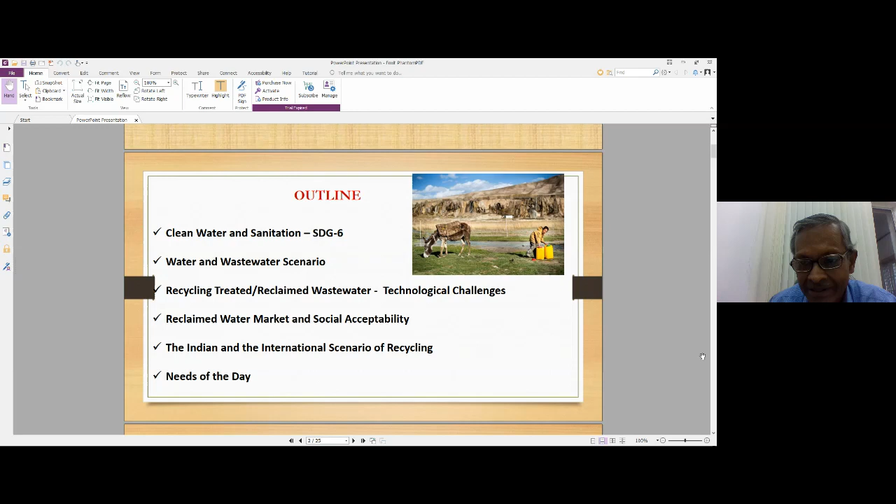And the Indian and international scenario of recycling and needs of the day - these are the things I will try to touch upon.

The Sustainable Development Goal 6, which includes clean water and sanitation, started as part of this set of 17 Sustainable Development Goals. Action on these goals began 5 years ago, following the UNDP Millennium Development Goals, where goal number 7 also included water and sanitation issues under the name 'ensure environmental sustainability.' The Millennium Development Goals were considered a big success, and that is why the Sustainable Development Goals started as a follow-up in the same year, 2015.

So Sustainable Development Goal number 6's objective is to ensure access to water and sanitation for all. Other aspects include safe and resilient water supply for economic prosperity and environmental sustainability, equitable and affordable drinking water for all, and sustainable sanitation and hygiene.

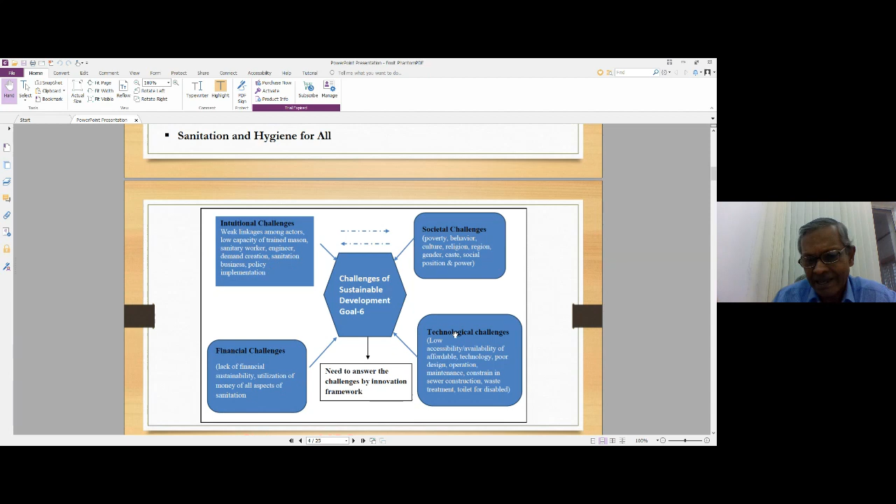There are quite a few challenges associated with this goal number 6. Like any other goal under the 17 Sustainable Development Goals, each goal has its own challenges. For goal number 6, these are institutional challenges, societal challenges, financial challenges, and technological challenges. There are a few other challenges too, but these are the major ones.

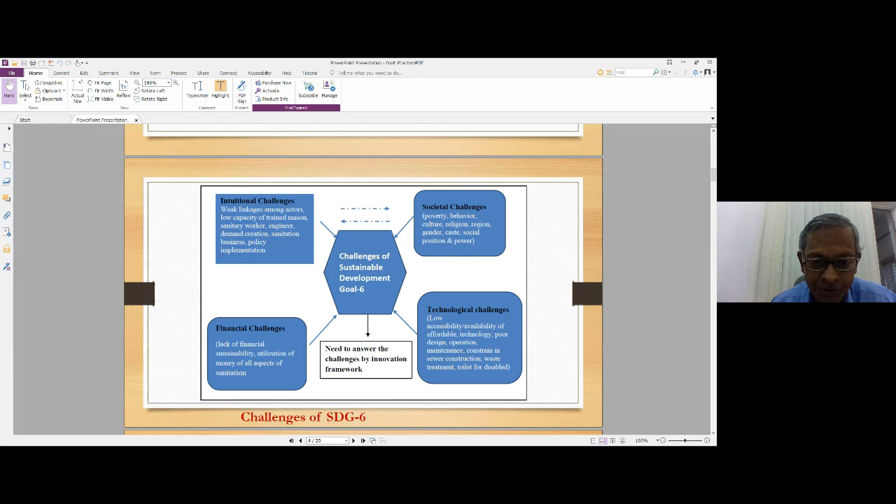Let us have a look at what kind of actions have been taken, and what are the outcomes.

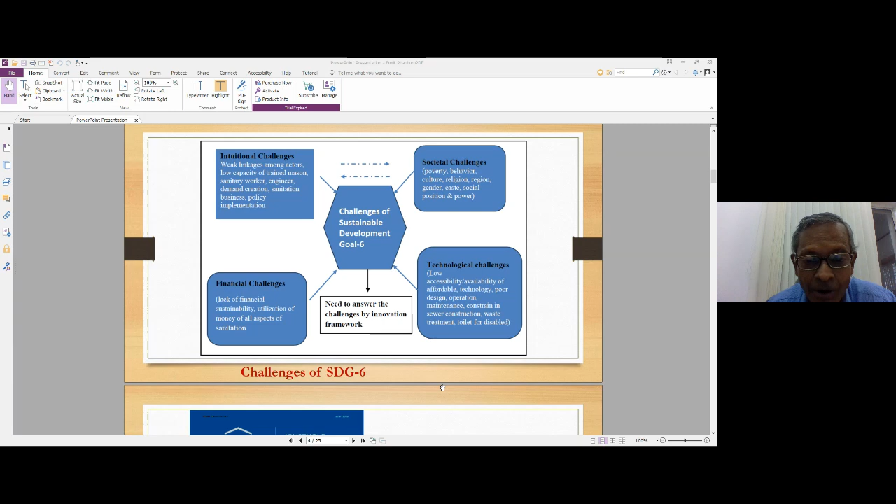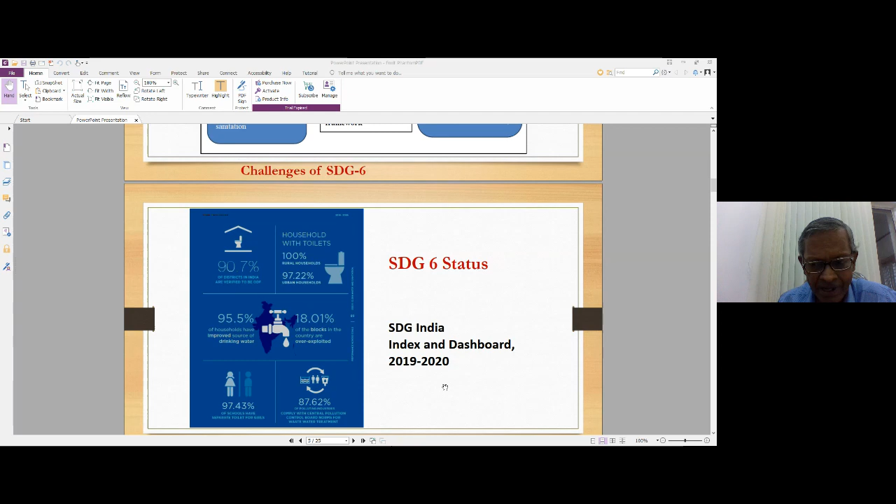In our country, this slide is not very clear, but even then much of Sustainable Development Goal number 6 has been achieved, like water supply and sanitation, because we have a very big program called Swachh Bharat. Under that program, sanitation has improved a lot, and also the rural drinking water mission has ensured drinking water supply in many places all over the country.

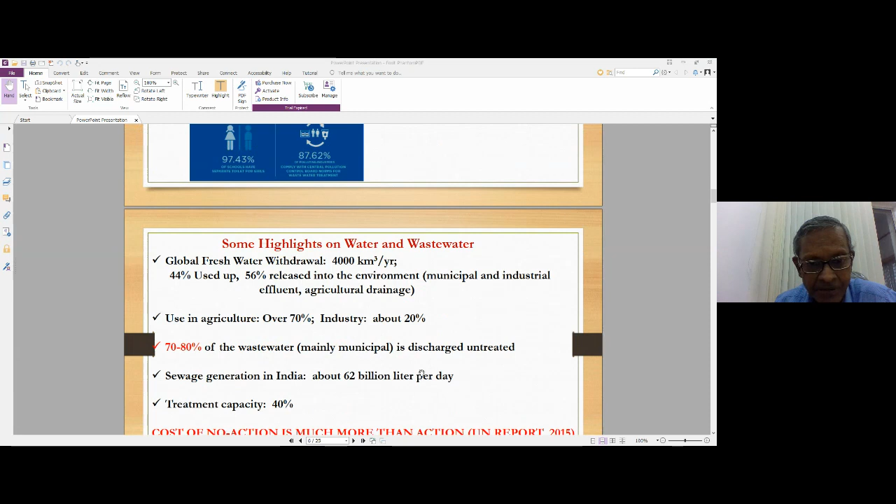So these are some highlights on water and wastewater. The global freshwater withdrawal is 4,000 cubic kilometers per year, a huge quantity, of which about 44% is used up and 56% is released into the environment. The water used up is mainly for agricultural purposes, and whatever water is recycled back comes either in a treated form or much of it returns to the environment again.

The used up water, or wastewater, much of it comes back to the environment untreated. About 70 to 80% of the wastewater all over the world returns back to the environment without any treatment.

In our country, since this webinar's main topic is sewage, its treatment, and wastewater treatment, let us have a look at the sewage generation. What is the amount of sewage generation in our country? It is about 62 billion liters a day, and the treatment capacity is 40%.

But as a matter of fact, this 40% is what is on paper, depending upon how many wastewater treatment plants have been set up - but not all of them are actually operative.

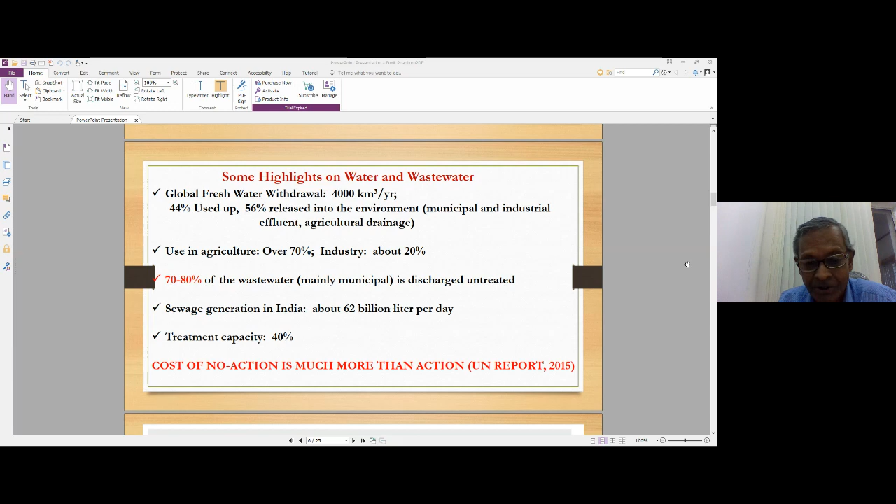And it is a matter of fact again that we have to take action to not allow the wastewater to go back to the environment untreated, because the cost of no action is much more than the cost of action.

This slide shows how the water treatment scenario has evolved in agriculture. Agriculture is the biggest user of water - about 70% of the total water we use goes to agriculture, and about 20% to industries worldwide. In our country the figure is less; industrial use of wastewater is about 10% of the total, but globally it is about 20%.

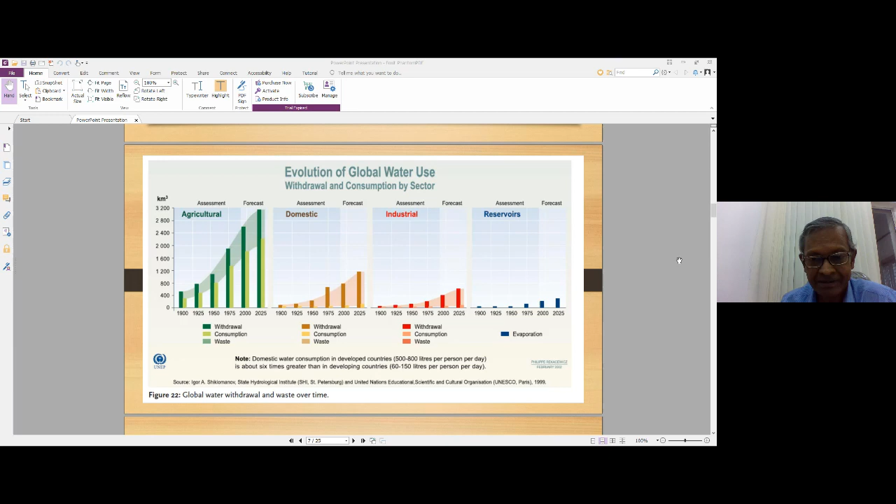This picture gives the global scenario of consumption patterns - how much water is absorbed and used in agriculture, and how much of it is lost. Lost means it goes into the soil, is taken up by plants, and a part of it is released as agricultural drainage.

For municipal water supply also, a major part of the water comes back as wastewater, and the same is true for industrial water use, where a significant part is released as wastewater. So this picture gives a view of the treatment and wastewater release pattern, and an idea about how much wastewater is generated in our country.

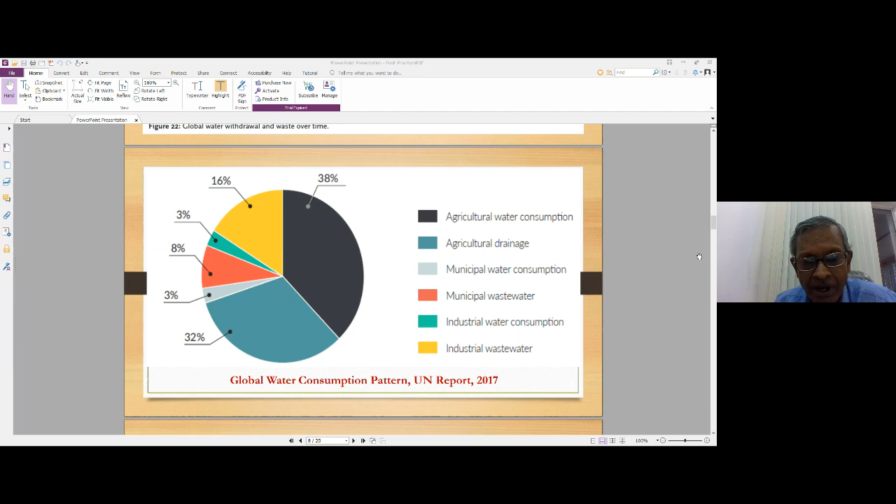As I told you, it is about 62 million, it should be 62 billion liters per day, or 61,754 according to CPCB estimate. The untreated sewage is about 38 billion liters per day, and the treated sewage is about 23 billion liters per day.

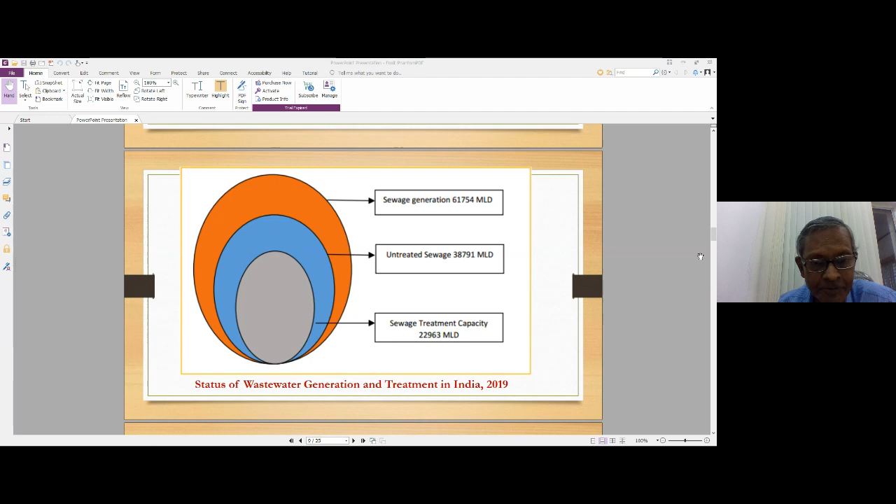This is the projected growth of water demand from 1990 to 2050. The projected growth from 2010 to 2050 is much higher, and in 2050 it is expected that 10% of the water will be used for industry and power.

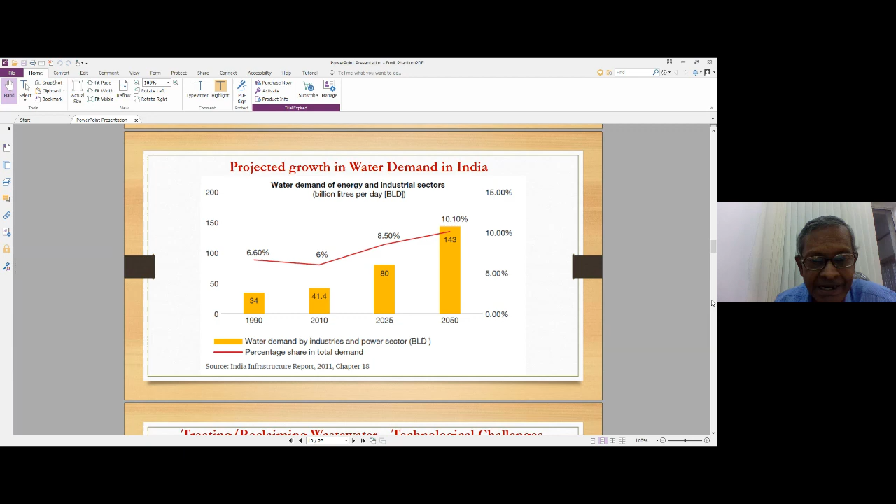Okay, then reclaimed water - what about the cost, the market, the social acceptance? Water scarcity is a very big issue, and what we need is that wastewater management should be revolutionized, because huge quantities of wastewater are released into the environment. We should make all attempts to treat this wastewater to a level so that it can be used again, not only for industrial purposes but for municipal purposes too. So wastewater policies and water politics too have to have a relook.

And use of reclaimed water, which is already used in other places - this use of reclaimed water is repugnant to many. We have a psychological barrier to the use of wastewater, and I'll tell you later that if there is an environmental buffer in the way of use of treated wastewater, then it becomes acceptable.

For example, if we treat municipal wastewater and throw it in a river, the river receives all the wastewater. But then if the river water is taken up, treated, and supplied as municipal water, we don't feel any psychological barrier, because there is an environmental buffer. The wastewater is not directly used, but discharged into a much bigger reservoir, like a river or lake. Then if this water is taken up again, treated, and supplied as municipal water, much of that psychological barrier is gone.

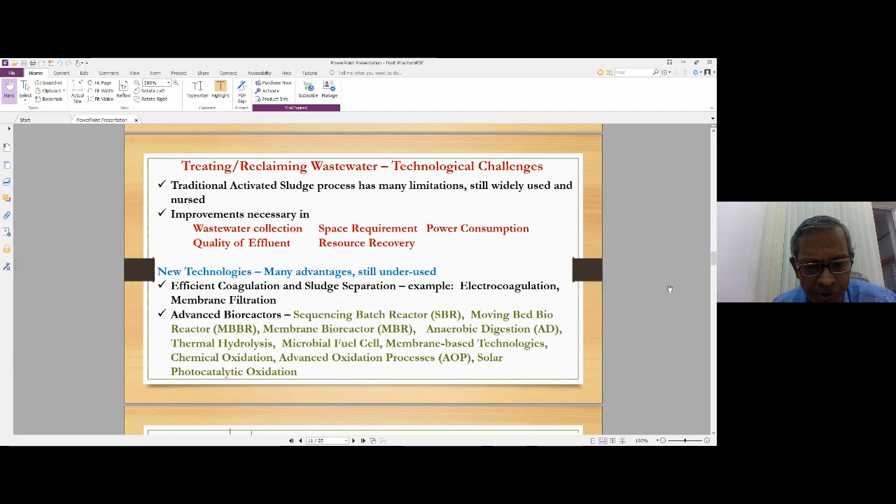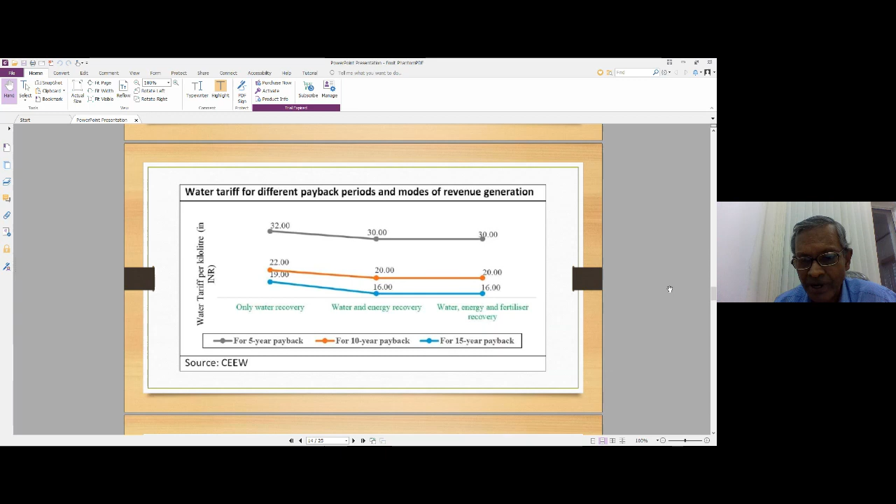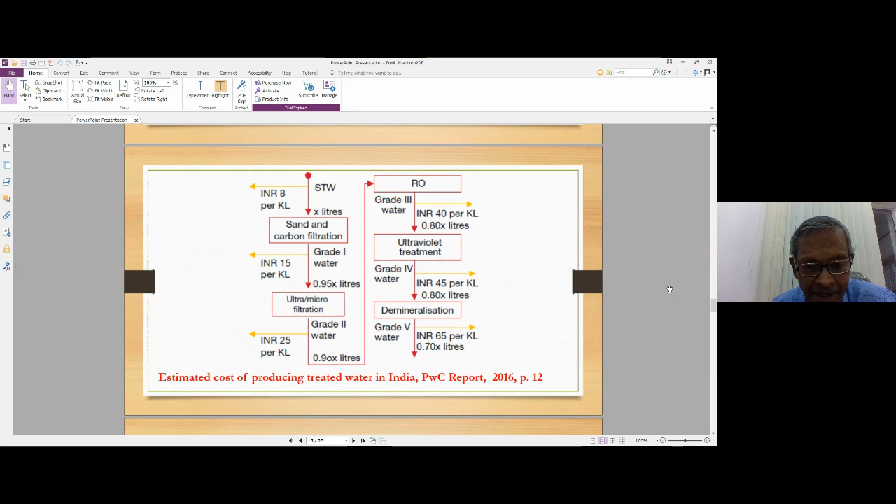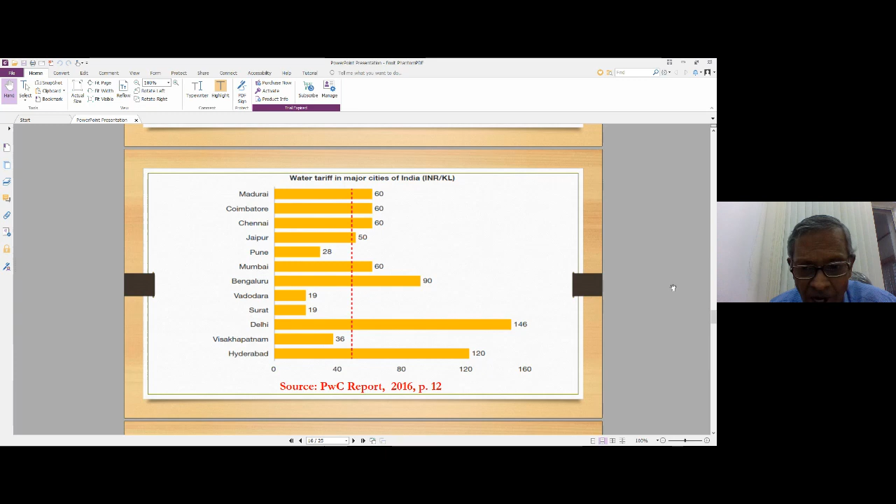Okay, water recycling - what is the Indian scenario? In our country, we have about 17% of global population, but we have only 4% of global fresh water. That makes the situation in our country pretty much difficult, pretty much critical.

And the wastewater treatment capacity is much low - it is 40% theoretically, based on the treatment capacity of the waste treatment plants we have. But as I told you before, many of them are not working. And then there's poor sewerage network - that is another big issue, because in order to treat wastewater we have to collect it. But in many places the sewerage network condition is very poor, much of the sewerage cannot be collected, so there is no question of treatment. This also has to be improved.

Our national water policy of 2012 is the latest policy we have. The first national water policy came up in 1988. In this modified water policy too, emphasis has been placed on water recycling. There are many other issues like access to technology and finance - these are very big issues. As far as wastewater treatment and recycling in industries is concerned, this started in the year 1990, 30 years ago, with Chennai Petroleum Corporation.

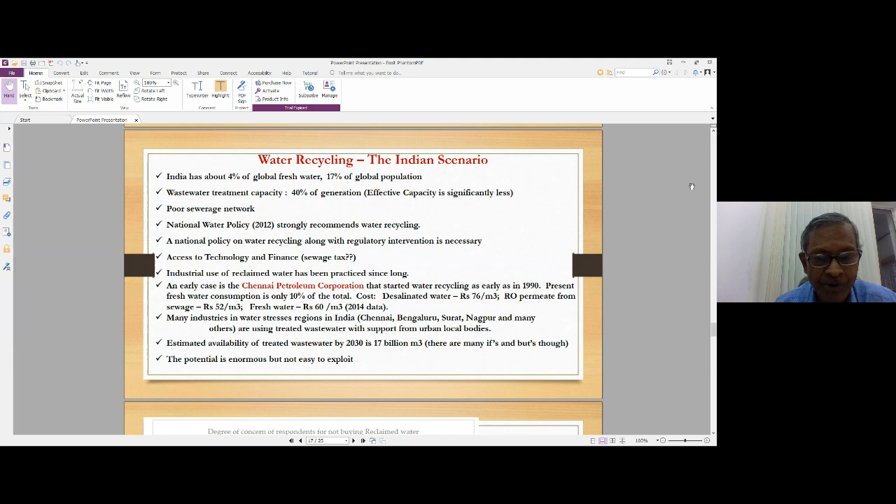Well, so far as utilization of this treated water, there are quite a few examples. Singapore's NEWater program started about 20 years ago.

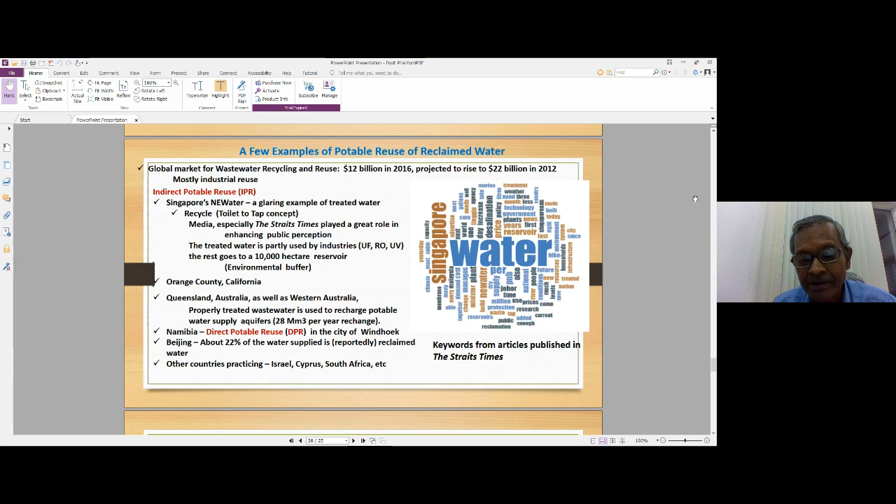I can still remember reading about it in the newspaper, the Straits Times, when I was in Malaysia in the early last decade. Anyway, this picture shows how they use the media to arouse consciousness among the people for use of this wastewater. And now the people say that...

It is truly said that we should utilize the principle of circular economy not only for generating water but also for generating resources from wastewater. If we can generate different kinds of resources, especially phosphorus and nitrogen, it will be of great help.

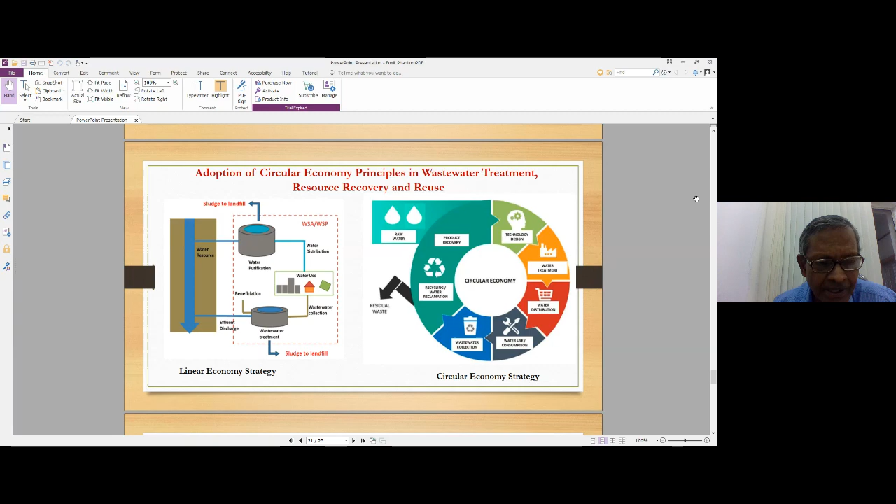So I'll conclude with this slide on what are the needs of the day. There should be a sound national policy and also a regulatory intervention, because if there is only a policy, many people may not abide by it. But if there is a regulatory intervention that a part of the wastewater has to be recycled and used in industries...

In fact, while visiting quite a few industries under a CPCB program during the last 3 years, I have seen that many industries can utilize the wastewater after treating it, but they do not. So there has to be a regulatory provision for this.

There should be a PPP structure that may help, along with adoption of suitable technology. Particularly, it should be more efficient technology, meaning the unit should be smaller and diversified. So there may not be enough space to build a big wastewater treatment plant, but if the plants are smaller in size, it can be decentralized.

Like the one that Professor Ghangrekar will speak on - the concept of canal top. The canal through which wastewater is being discharged - on top of the canal we make a small wastewater treatment unit, small but very highly technologically efficient.

So that is probably what we should move forward to. It is necessary, I tell you again, that what is necessary is a policy and also regulatory intervention. It should be followed by use of upgraded technology and generation of consciousness among the people, public alertness and awareness about treated wastewater reuse.

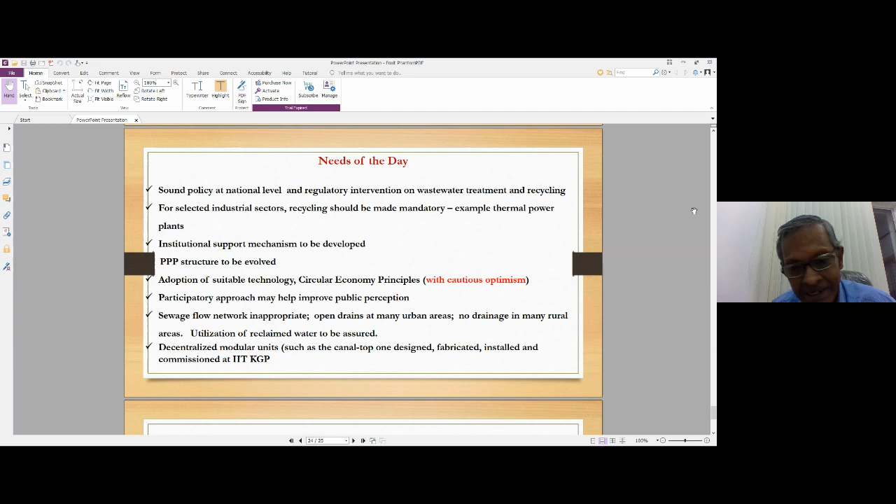So this is what I have to say about wastewater treatment, its recycle and reuse. Thank you very much for your attention. Thank you.

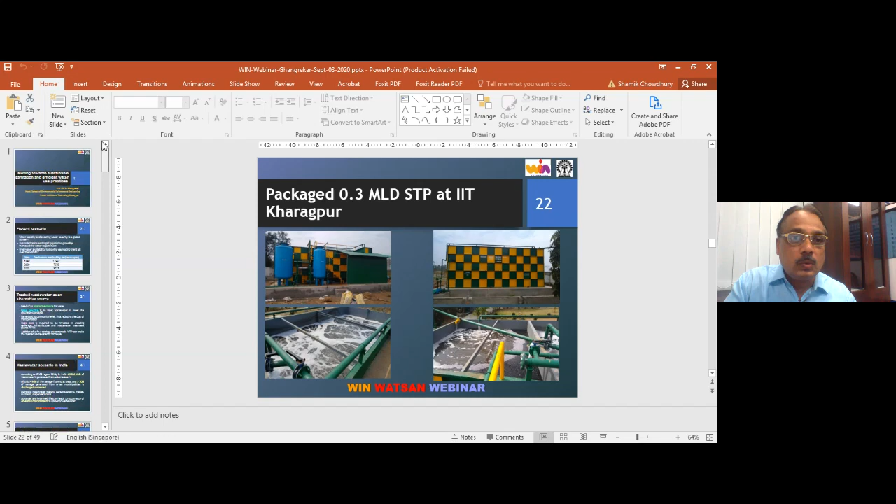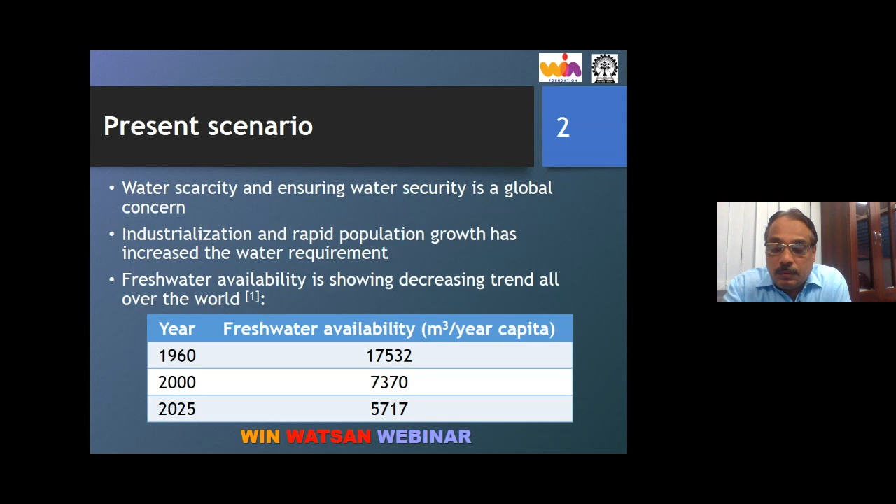So the present scenario, as already initiated by Professor Datta: water scarcity and ensuring water security is a global concern right now. Industrialization and rapid population growth have increased water requirements, as we all know. Freshwater availability is reducing day by day, and we anticipate that by 2025, freshwater availability will be around 5,700 meter cube per capita per year. In this scenario, we really need to think of what could be the better alternative.

Treated wastewater could be used or exploited as an alternative source because it's a perennial source, available in all seasons. There's a need for an alternative source of water because freshwater quantity is reducing day by day.

The usual practice is to treat wastewater to meet discharge standards and discharge it into a water body, or use it for agriculture. It is generated at the community level, thus reducing the cost of transportation. Presently we are adopting centralized sewage treatment plants.

That means the wastewater or sewage generated from the city is taken to a common point far away from the city, and this makes it difficult, even if we give adequate treatment, to supply that treated water back to the city because a huge network of pipes and investment is required.

So instead, if we adopt decentralized sewage treatment and treat the sewage to the desired level, this treated sewage can be made available for many non-potable uses, or even, if treated properly, for domestic use. Huge cost is required to create sewage infrastructure and wastewater treatment plants, so decentralized sewage treatment may help in reducing the cost of sewerage infrastructure.

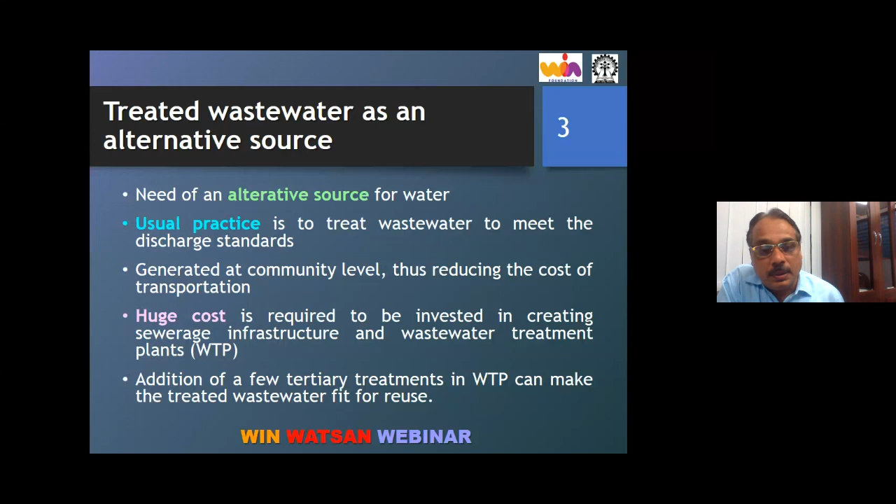However, it will add to the cost of sewage treatment plants because instead of a single plant, we will go for multiple plants. Addition of a few tertiary treatments to the conventional secondary treatment system that we adopt can make this treated water suitable to be reused for different applications.

According to CPCB statistics as per 2016, in India about 62,000 million liters of wastewater is generated every day. Out of this, greater than 90% of the sewage generated from rural areas and greater than 50% of the sewage generated from urban municipalities is discharged untreated. That means if we put both together, around two-thirds of the sewage generated in this country is discharged into water bodies without receiving adequate treatment.

Domestic wastewater mainly contains organic matter, suspended solids, nutrients, pathogens, and very low concentrations of heavy metals and other compounds. Advances and improved lifestyle lead to the occurrence of emerging contaminants.

These are additional challenges being introduced, like pharmaceuticals, antibiotics, and the personal care products and cosmetics that we use. These ultimately get discharged into domestic sewage, and we need proper technology for their removal, because some of these compounds are endocrine disruptors and can have adverse effects even at lower concentrations.

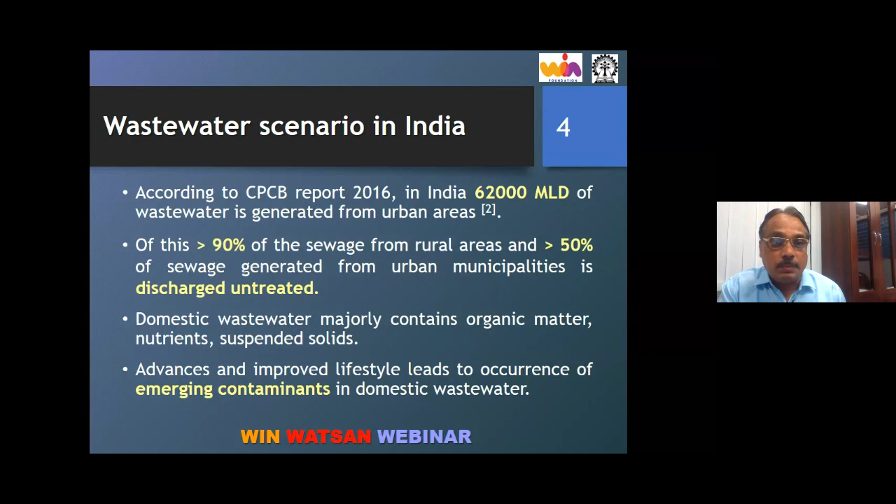Many areas in India are water stressed and spend huge costs on freshwater procurement and treatment. In countries like India, where we have a water distribution system, more than 20% of the water gets lost during distribution due to leakages and faulty joints. This makes locally available treated wastewater an attractive alternative to freshwater in water-stressed areas.

Basically, if we try treating sewage and reusing it for even non-kitchen purposes, nearly 40 to 60% of the freshwater demand can be reduced if we supplement or augment it with treated sewage. And socially, it should have acceptance because anyway we are not taking it for potable purpose.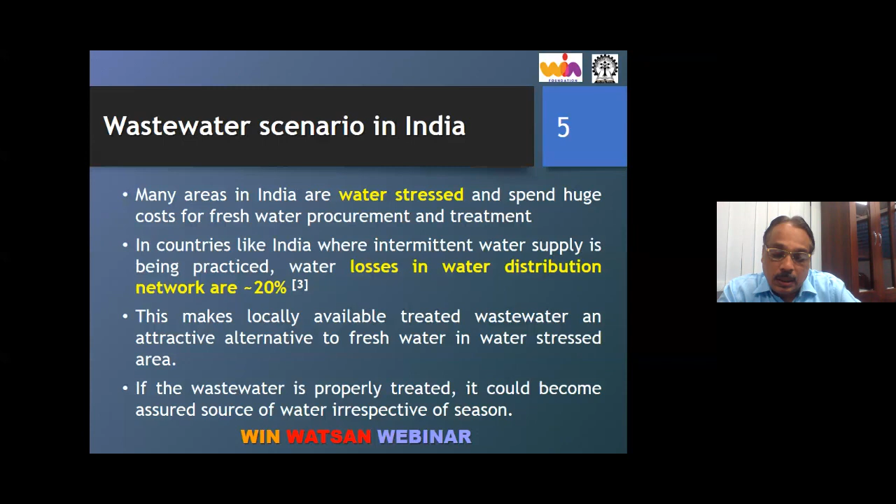If the wastewater is properly treated, it could become an assured source irrespective of the season, as many cities in India have routine water cuts during summer. That will not happen if we adopt the practices of treating sewage and supplying it to fulfill the freshwater demand. Typically, the wastewater treatment plant comprises primary treatment and secondary treatment.

These are common in the Indian scenario, and the recently built sewage treatment plants also have a few with tertiary treatment in place. However, it is very common in Europe and other developed countries, in US and Canada.

So the primary treatment necessarily comprises a coarse screen for removing coarse solids and a fine screen for removing fine solids, a grit chamber for removing settleable inorganic solids, and then an equalization or flotation unit, which may be optional.

Secondary treatment is provided for removal of colloidal and soluble organic matter, through biological treatment, either aerobic or anaerobic, followed by a secondary sedimentation tank to settle the solids produced during biological metabolism and removal of organic matter. This clarified effluent, generally called secondary treated effluent, may meet the discharge norms set by the Central Pollution Control Board in 1986.

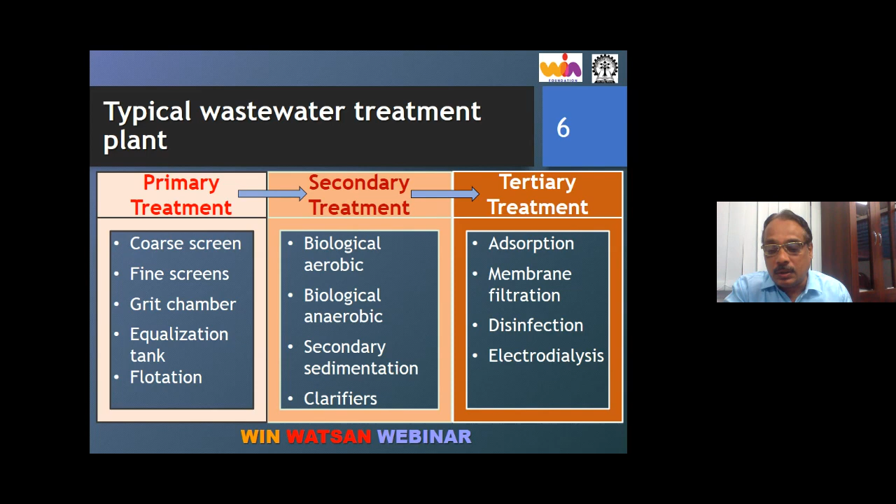But the recent norms cannot be met by secondary treatment alone, and tertiary treatment may be required, which may comprise adsorption, membrane filtration, disinfection, electrodialysis, or electrocoagulation. Several other technologies are coming up in recent times to replace secondary treatment.

As I already described, tertiary treatment is intended to meet the requirement for further removal of organic matter, further removal of nutrients that escape secondary treatment. It also reduces turbidity to make water crystal clear, and it is meant for removal of microorganisms so that the water is free from bacterial contamination.

It could also be supplemented for removal of color and odor, if any. Normally sanitary sewage has a color, but if the organic matter is removed, the color is lost because it was due to the presence of organic matter. In case of municipal wastewater, there may be some residual color because of the receipt from small scale industries, and we have to plan for removal of this if present.

In recent times we are also showing more concern about the removal of emerging contaminants, though they are in micro concentration, they have adverse effects.

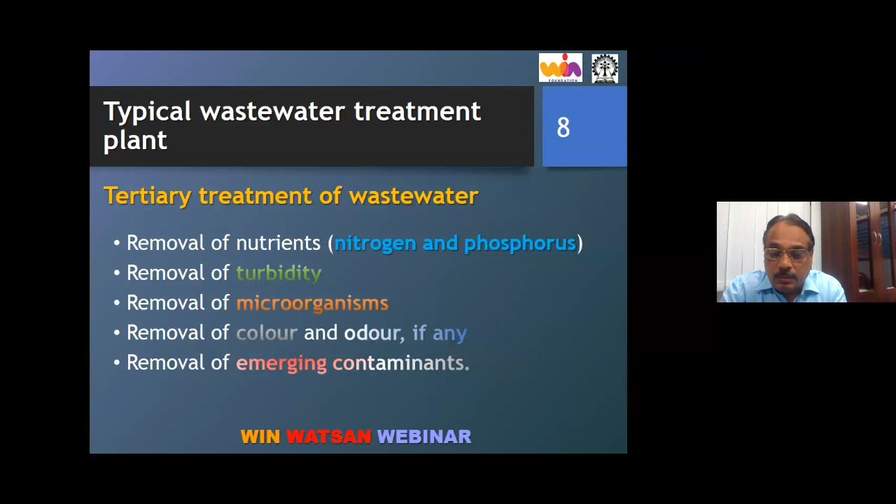The drawbacks of conventional STPs in India include the lack of skilled operators, leading to improper management of sewage treatment plants. If a centralized sewage treatment plant is improperly managed, it leads to a whole lot of pollution in the receiving water body, because it's a single treatment plant, and if it is not operated properly, obviously the whole amount of sewage will be discharged, either partially treated or untreated.

There is an absence of stringent action against defaulters; though the rules are in place, they are not strictly implemented in the Indian scenario. Many cities are still without functional STPs in India, even in the eastern part of India.

The sewage treatment plant concept has come up only in this decade. Orissa and West Bengal have very few sewage treatment plants. Jharkhand has only oxidation ponds wherever sewage treatment plants exist, including Chhattisgarh, which has only limited capacity in Raipur. No other places have sewage treatment plants. So this is the scenario we have.

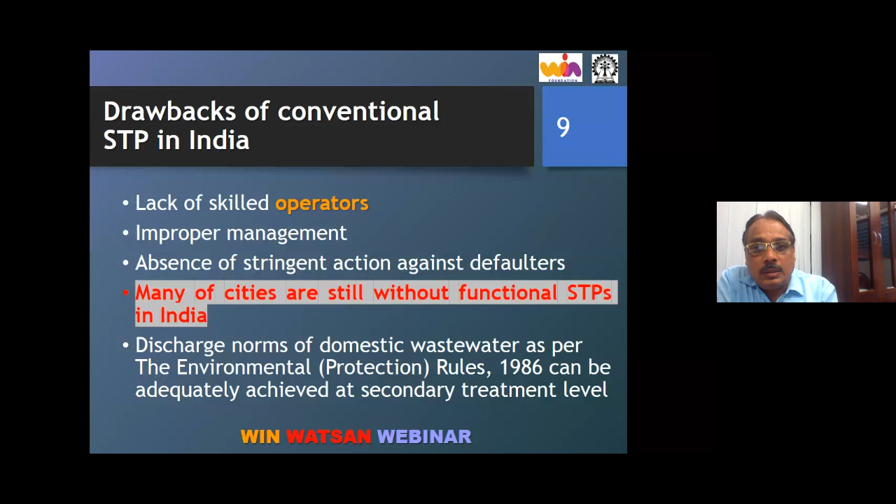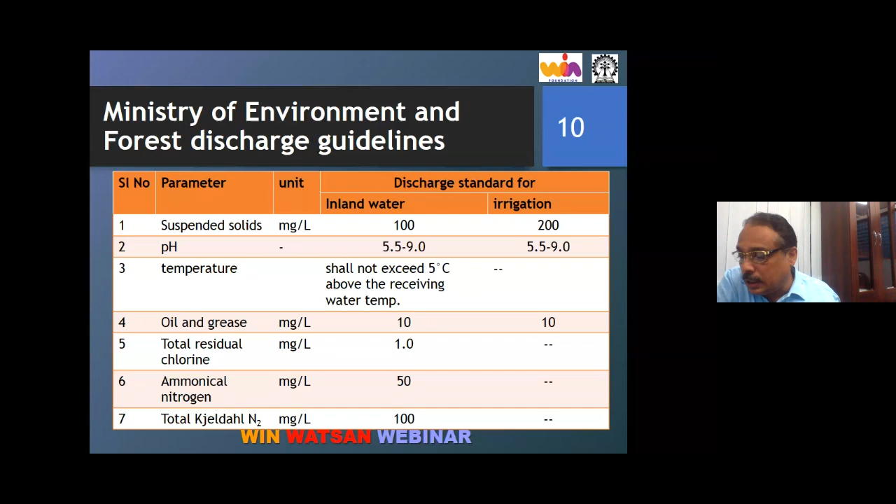The discharge norms for domestic wastewater as per the Environmental Protection Rule 1986: the broad discharge norms are mostly classified as suspended solids about 100 milligrams per liter and biochemical oxygen demand, BOD, around 30 milligrams per liter. There are other discharge norms too. These are the general standards for discharge of treated effluent into a water body.

However, these standards have recently been revised by the National Green Tribunal, and what they recommend now is that biochemical oxygen demand should be less than 10 milligrams per liter. So this is an overview; the characteristics and range depend on the type of city. pH should be 5.5 to 9, total suspended solids less than 20 milligrams per liter, chemical oxygen demand should be less than 50 milligrams per liter, nitrogen as total nitrogen less than 10 milligrams per liter, total phosphorus should be less than or equal to 1 milligram per liter, and coliform presence should permissibly be less than 230 coliform numbers per 100 ml.

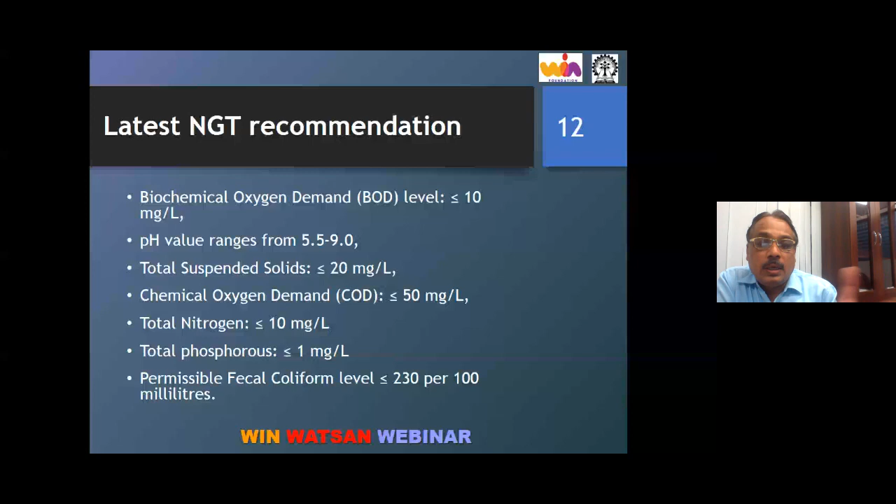City-wise, some relaxation has been given for class 1 cities - cities with population more than 1 lakh but less than 10 lakh, and other cities with marine discharge. There is some relaxation given by NGT. However, the standards we talked about are applicable for mega metro cities and metro cities, typically where population is more than 10 lakhs.

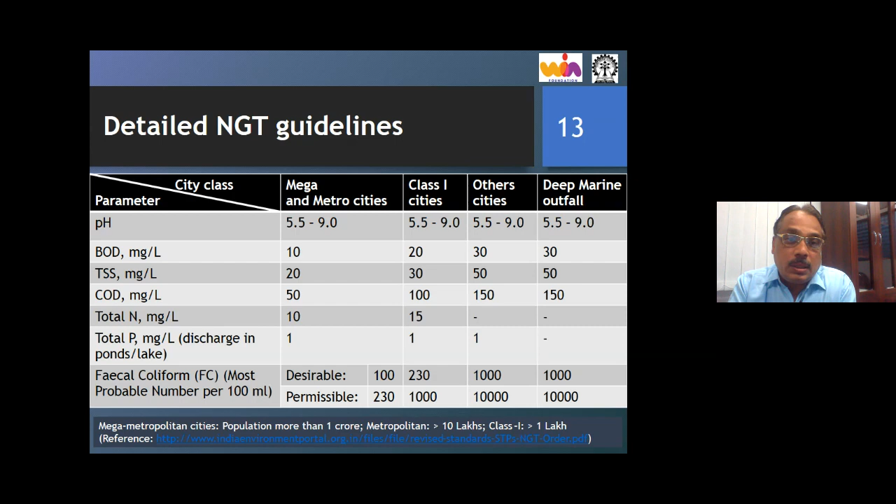This is a standard that we have to meet even for existing sewage treatment plants, and they are unable to meet these requirements. So NGT has said that by the end of 2020, these plants, even existing treatment plants, should comply with this discharge standard. These discharge limits are not achieved by secondary treatment alone.

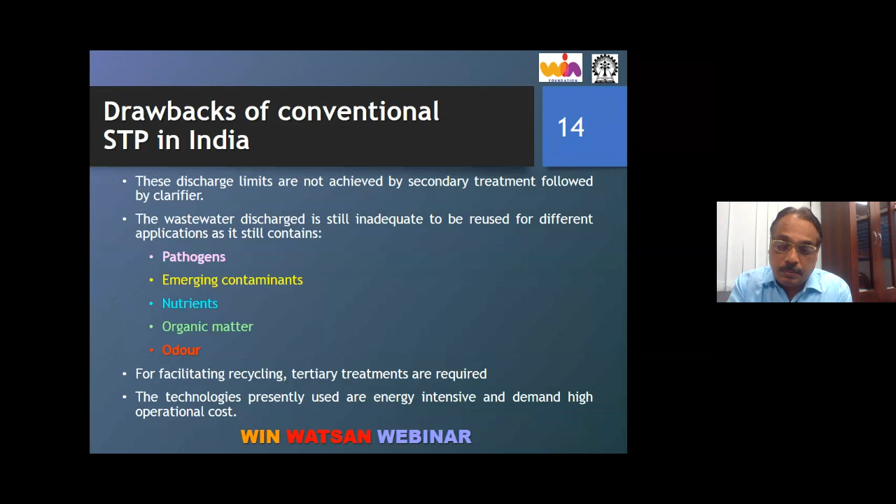Hence, the wastewater discharge is still inadequate to be reused for different applications, as it still contains pathogens, emerging contaminants, nutrients, organic matter, and odor. For facilitating recycling, tertiary treatment is a must, and the technologies presently used are energy intensive, like activated sludge process which demands a lot more energy to aerate wastewater. Many municipalities are reluctant to spend that amount of energy, hence partially treated sewage is being discharged. The aerators are not operated at full capacity, and this results in not meeting the stringent effluent norms.

The requirement of further upgradation involves augmenting the conventional secondary treatment with advanced treatment techniques. We can install multi-stage filters with multi-stage advanced oxidation process. A lot more AOP systems are coming up.

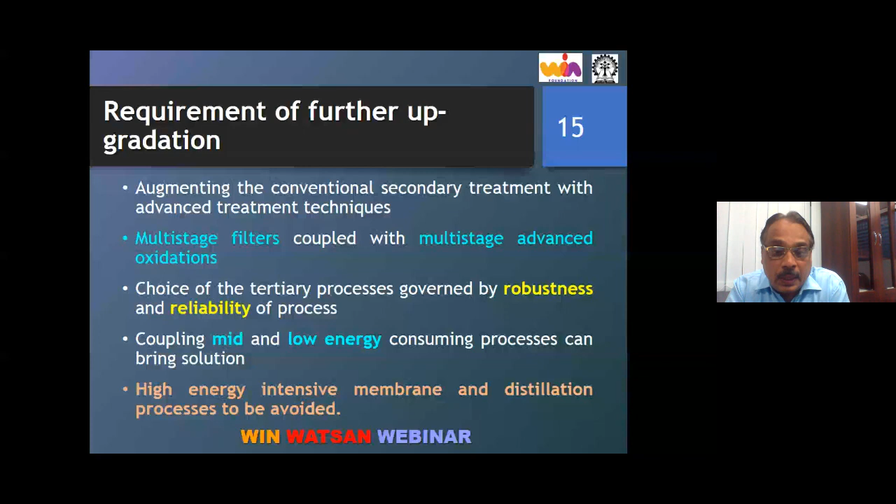Choices of tertiary treatment depend upon the robustness and reliability of the process. Coupling mid and low energy consuming technologies may bring sustainable solutions, as opposed to high energy intensive membrane processes currently used, like reverse osmosis which has been popularly used in India and abroad. We need to find alternatives, because reverse osmosis processing cost may become around 35 to 70 rupees per kiloliter depending on capacity. If treated water costs this much, there will be less acceptance. So we need to find sustainable alternatives.

For giving sustainability to sewage treatment, the foremost thing we need to look upon is producing reusable quality treated water, which will help reduce stress on freshwater demand, because in many places, even if people are ready to pay, freshwater is not available. There is scarcity, particularly in summer season.

We can exploit technology that provides opportunity to harvest algae, which can be used as feedstock for biofuels, bringing revenue generation. Upcoming technologies like microbial fuel cells can be employed to generate direct electricity while treating wastewater. The sewage sludge generated in existing sewage treatment plants can be exploited as activated biochar, which will also fetch returns by selling or employing that biochar.

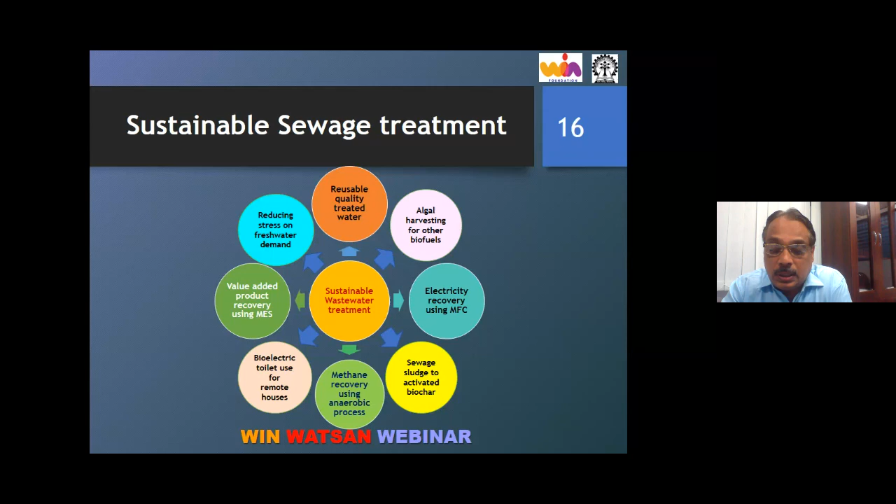Methane recovery using anaerobic processes is a common and adopted model now in many places in Asia, African countries, and South American countries. Bioelectric toilets, a concept developed at IIT Kharagpur, can be adopted for clusters of houses located away from the electric grid and water supply lines, making sanitation sustainable. We should further exploit value-added product recovery using the recently invented concept of microbial electrosynthesis, where various chemicals can be synthesized from wastewater while simultaneously providing adequate treatment.

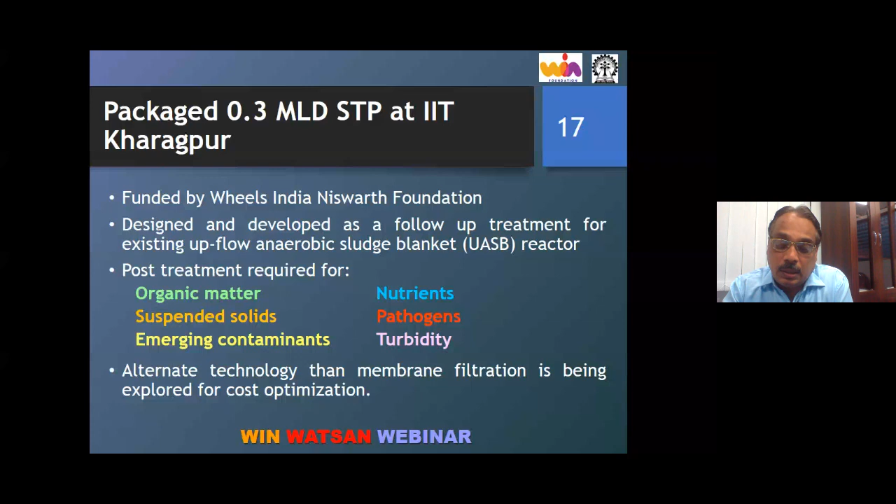Our objective is to provide an alternative technology to membrane processes, still making the water quality suitable, or produce water quality close to potable water quality. Though at present we are not encouraging this water for potable purposes, we are sure that this water can be reused for purposes other than kitchen reuses.

The salient features of the water treatment plant include a modular design adopted to reduce footprint. Three-stage disinfection is adopted, which is a combination of chlorination, ozonation, and UV disinfection.

For pathogen destruction and destruction of emerging contaminants, the system has minimal moving parts so that perishable items or frequent maintenance can be reduced, and hence the cost of operation can be made minimum to produce effluent meeting discharge norms, in absence of membrane filtration, and to produce close to potable quality treated water.

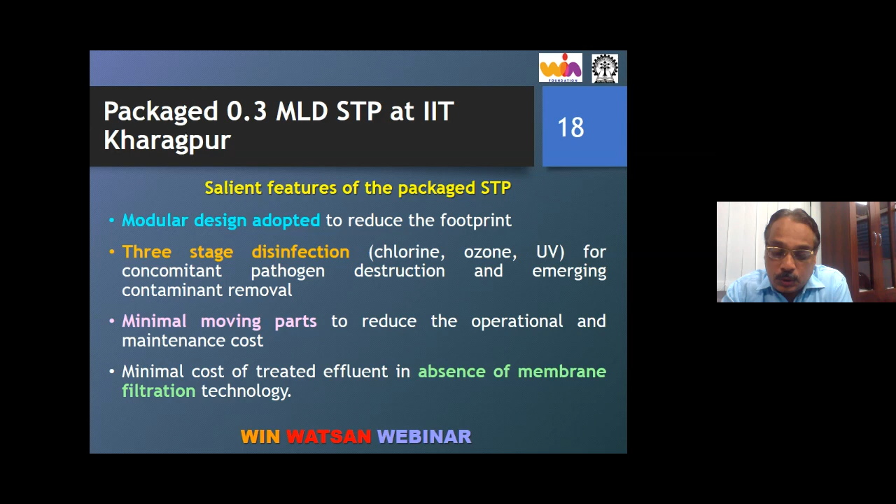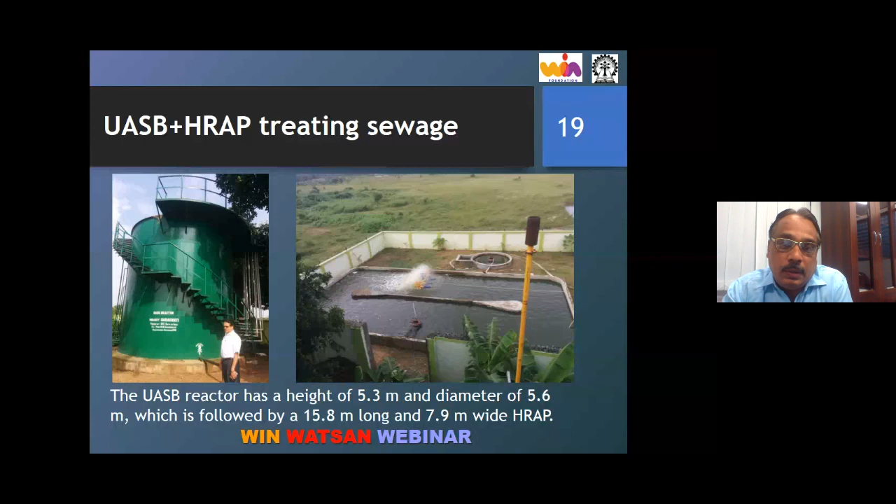This is the existing facility we had: the UASB reactor followed by the high rate oxidation pond, high rate algal pond. However, we would like to replace this high rate algal pond with the new modular treatment plant that I propose.

This is the performance of the UASB reactor throughout the year. It can give around 60 to 70% COD removal efficiency and produce effluent having total COD concentration in the range of around 60 to 80 milligrams per liter, varying with the season.

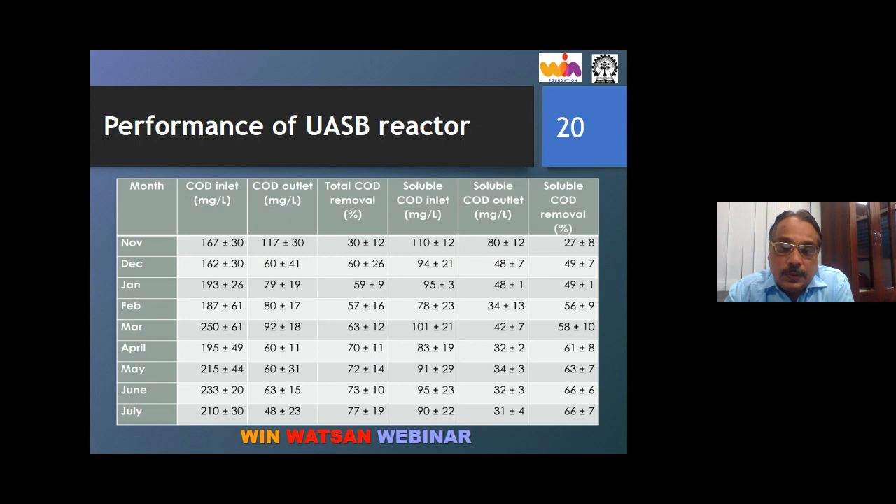This needs to be treated further to make it reusable quality. So the effluent of the UASB reactor is admitted to the first anoxic MBBR, then to the aerobic MBBR. More than 50% of the aerobic MBBR liquid is recycled back to the anoxic MBBR to facilitate denitrification. According to the nitrogen concentration, we have to balance this recycling, a mass balance of the recycling.

Then the effluent of the aerobic MBBR goes to the flocculator to remove flocculating particulate matter - bacterial cells will be agglomerated and settled in the lamella clarifier. Then we have a filter feed tank where chlorination can be done. We have kept that optional depending upon the need, and we will decide the chlorine dose.

It goes to the DMF filter followed by UV and ozonator. We are trying to experiment with the order of this disinfection - whether ozonator, UV, or chlorination - the order we will decide accordingly. Then it goes to the activated carbon filter to produce finally treated quality water for any reuse.

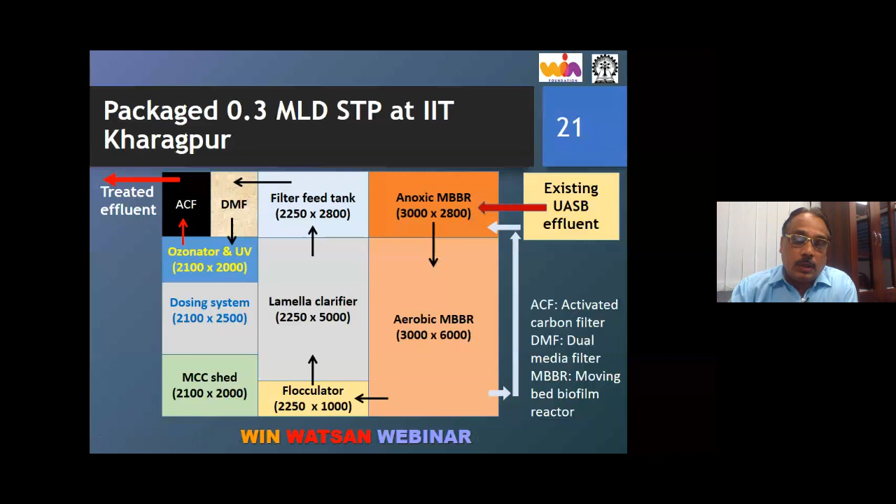Tertiary treatment - the ozonator, and you can see the UV light - we could not install because the working manpower is not allowed; it's restricted because of the lockdown. We are currently operating only with the biological reactors.

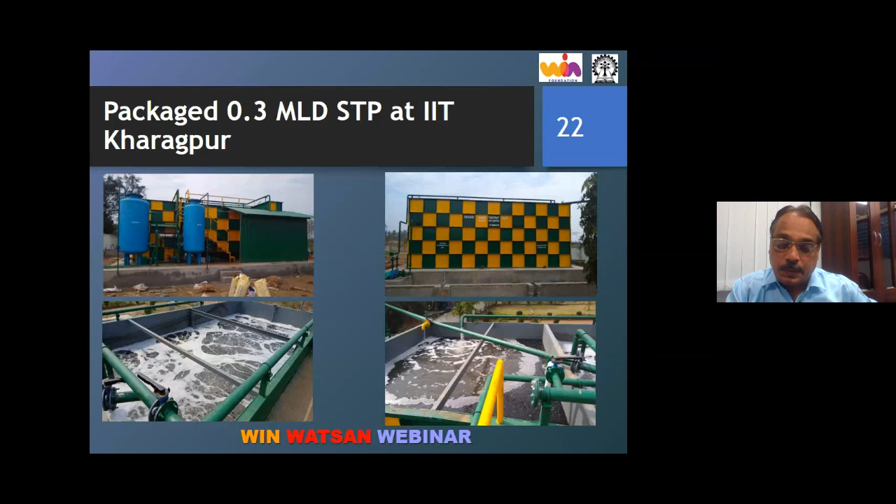But the system is in place now. Today, the government of India has given some relaxation, so we expect that we will be in a position to commission the full plant within a week.

So this is the performance we are getting. The COD removal efficiency from the UASB effluent is about 76%, producing 28 milligrams per liter effluent COD. When the COD is 28 milligrams per liter, the BOD, though we have not sampled it many times, from whatever few samplings we did, remains around 5 to 8 milligrams per liter, so necessarily less than 10 milligrams per liter.

So definitely, even with the secondary treatment, it is meeting NGT norms. The nitrogen concentration is 3.5 milligrams per liter, still meeting NGT norms. Total suspended solids, instead of 10, we are getting 1.5 milligrams per liter without using membrane filtration, so that is attractive.

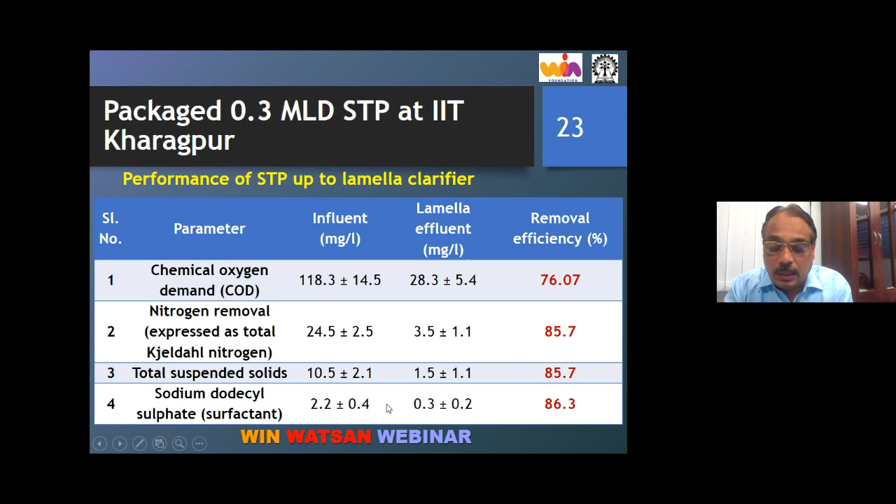We are also trying to find out the removal of surfactants. The anionic surfactant like SDS, the input is 2.2 milligrams per liter, which is reduced down to 0.3 milligrams per liter. Quite encouraging results that we obtained.

The similar model that we are trying to replicate at higher capacity, and that plant is under construction at IIT Kharagpur, and we expect that we will be able to produce.

Our target cost of treatment is to restrict it to less than 15 rupees per kiloliter of water, and we are very much within that limit. That's what the initial experience is telling us.

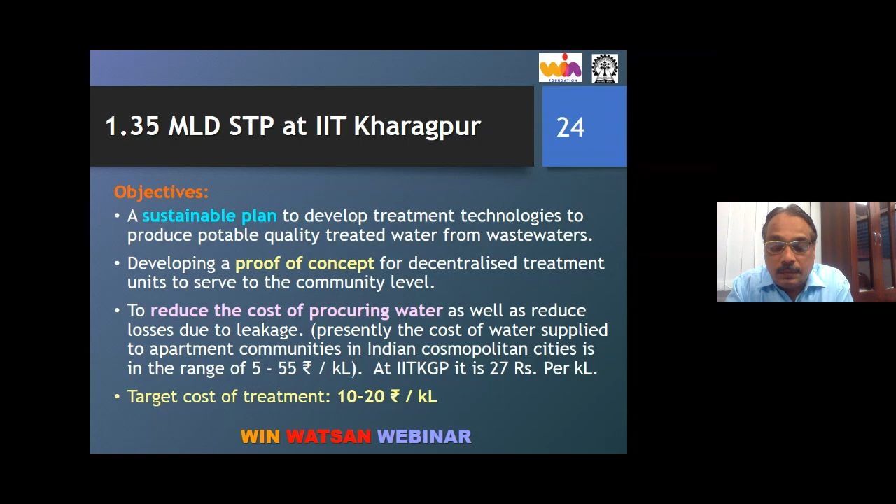Generally in India, the water supply cost varies from 5 to 55 rupees per kiloliter. If we are able to treat water at 10 to 15 rupees per kiloliter, there is a net saving. At IIT Kharagpur, we are spending 27 rupees per kiloliter of fresh water supply, so if we are able to save 10 to 12 rupees per kiloliter, that is a net saving to the institute, where we are serving 30,000 people with 27 rupees per kiloliter of water supply rate.

This is the overall plan of the 1.35 MLD sewage treatment plant. I already covered the standalone system because of shortage of time, so I'm just skipping this.

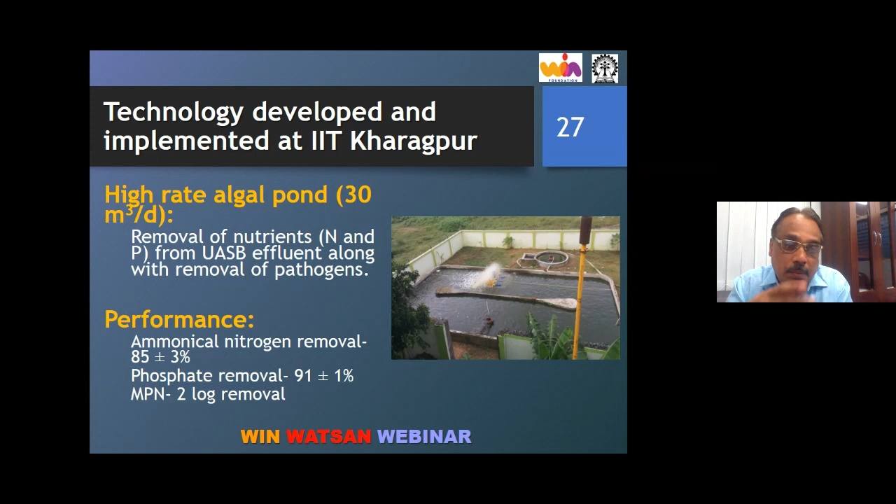The high rate algal pond, which is at present performing, is giving ammonia removal of about 85%, phosphorus removal of about 91%, and MPN about 2 log scale reduction is possible.

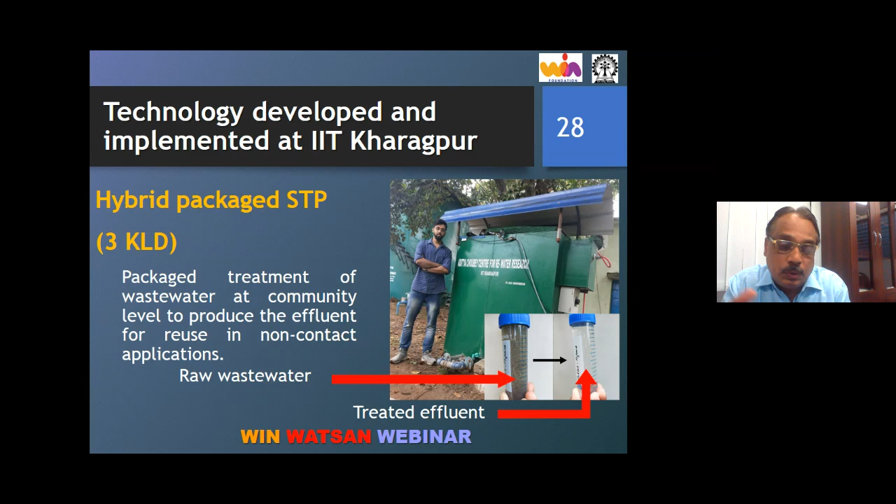Before moving to this 300 meter cube sewage treatment plant, we initially modeled a pilot of 3 kiloliter per day treatment capacity. But instead of a lamella clarifier, to reduce the footprint, here we have provided an MBR system.

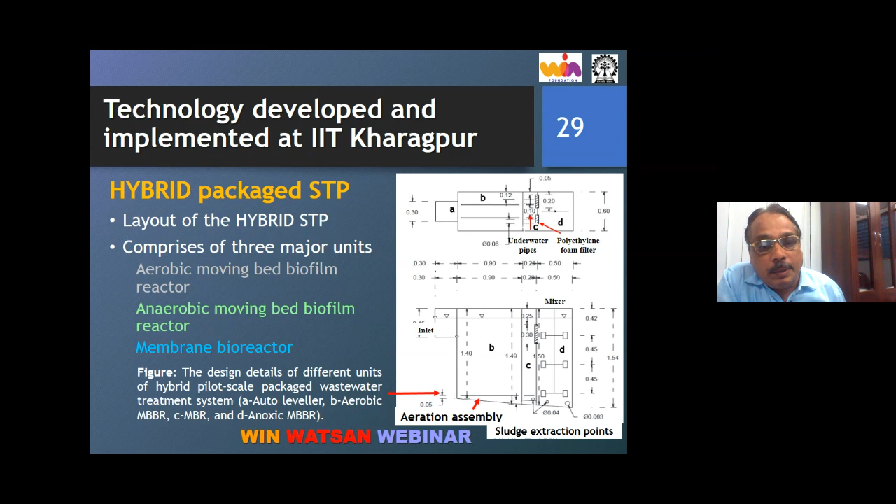This hybrid reactor consists of two-stage MBBR, anaerobic and aerobic, followed by a membrane bioreactor. These are in series, and we operated this plant for 1 year. You can see the performance result: the average influent COD to this plant is 228 milligram per liter.

90% COD removal efficiency is obtained, and the effluent COD is 24 milligram per liter. BOD is brought down to 5.8 milligram per liter from an input of 151 milligram per liter, demonstrating 96% BOD removal efficiency. TSS removal is also substantial, with effluent TSS of 6.4 milligram per liter.

Nitrogen removal is also reasonably encouraging. The effluent has TKN of 2 milligram per liter, and phosphorus is brought down to 0.17 milligram per liter.

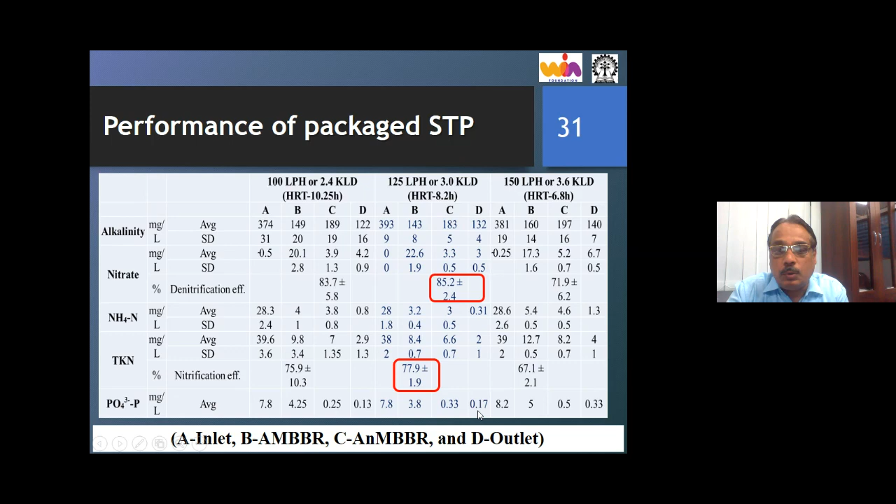Encouraged with this experience, we scaled up to a 300 meter cube sewage treatment plant. But instead of a membrane bioreactor, to reduce the cost further, we provided a flocculator and clarifier there with 3-stage disinfection.

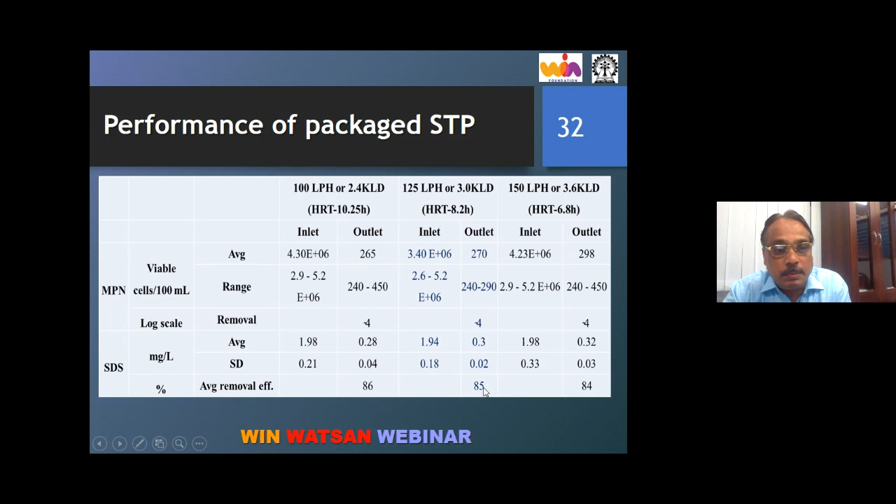For MPN, you can see it is brought down from 10 raised to power 6 to just 10 raised to power 2. So in the hundreds, we achieved a removal of similar magnitude as in the larger treatment plant, getting 85% removal.

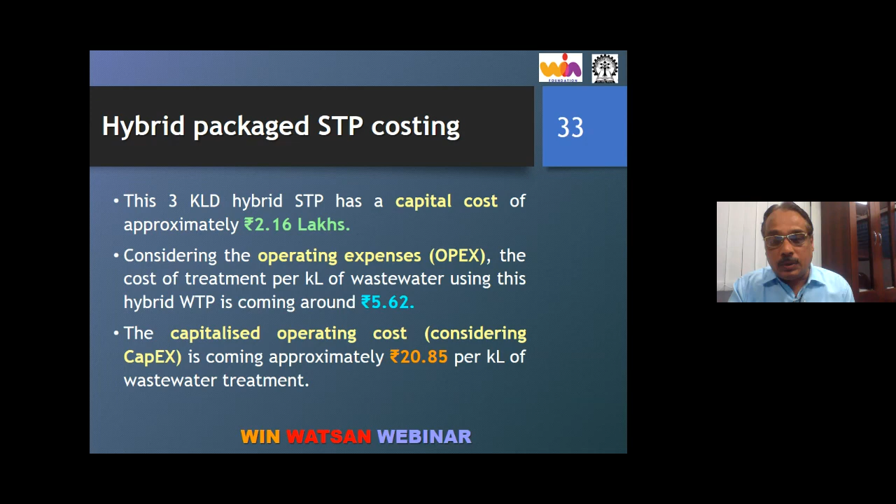It's a reasonably encouraging result, and regarding costing, the operational cost of this plant at 3 meter cube per day capacity is 5.62 rupees per kiloliter, considering only operating cost. If we consider capitalized cost, it goes up because of the lesser size to about 20.85, nearly 21 rupees per kiloliter at 3 meter cube capacity.

If we expand it to 1 MLD capacity treatment plant, this cost comes down to around 8 rupees per kiloliter. That includes also the cost of disinfection and the membrane process.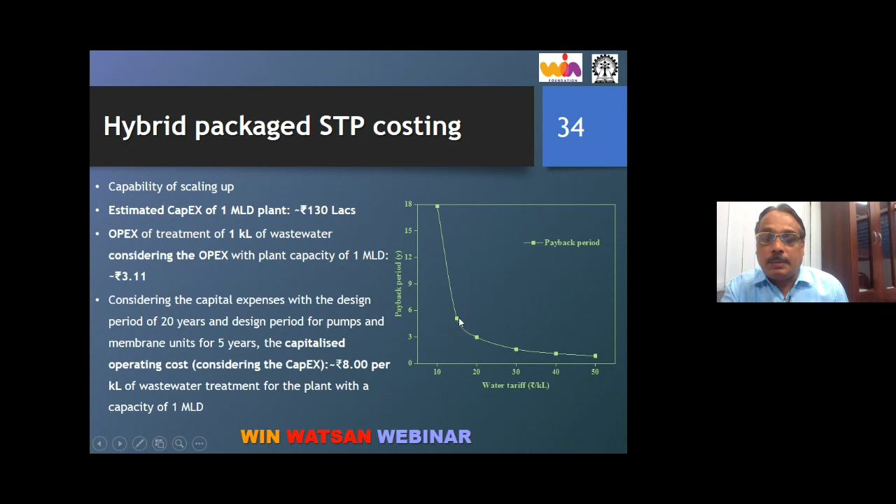This is the payback period, which those in commercial ventures want to know. Depending upon the water tariff, the investment cost and payback period will depend. Higher the water tariff, obviously the payback period will be smaller. Lower the water tariff, the payback period will be higher.

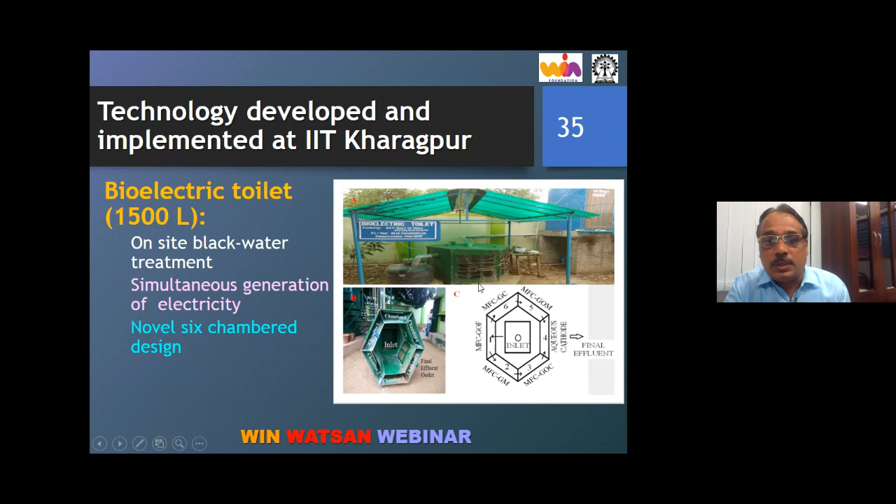The last and very interesting innovation we did at IIT Kharagpur comprises a microbial fuel cell based on-site sewage treatment. You can see a toilet to which this MFC-based treatment system is attached, and this is treating the sewage to the desired standard so that this treated sewage can be recycled back for flushing.

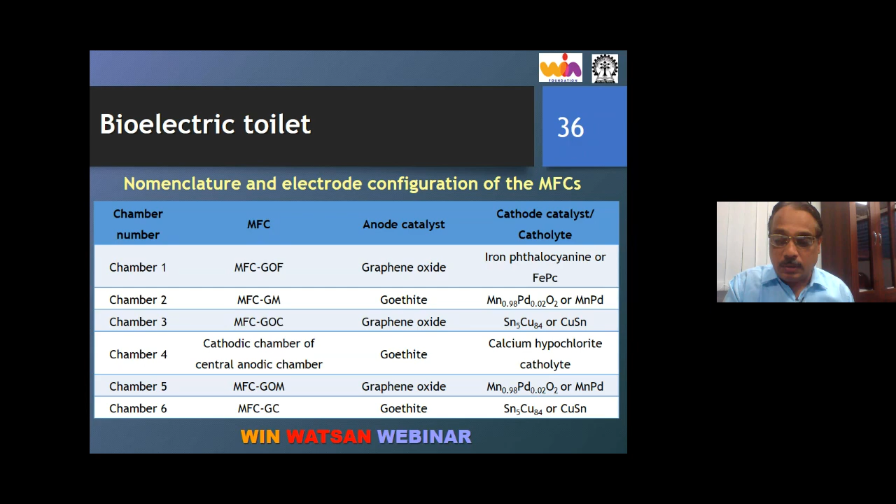This is the details; those who are interested can contact me, and I will share more details. Because of limited time, I'm skipping the detail of the electrochemistry.

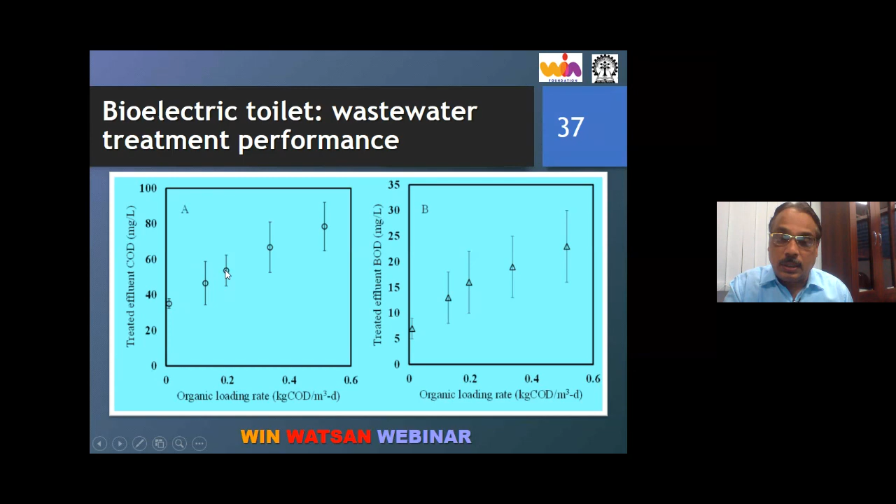What encourages you is that under different organic loading rates, we operated this system, and when operated at an organic loading rate of 0.2, it produces effluent with BOD of 15 milligram per liter, COD of nearly less than 50 milligram per liter, and MPN in terms of 100 per 100 ml. So this water is suitable for reuse.

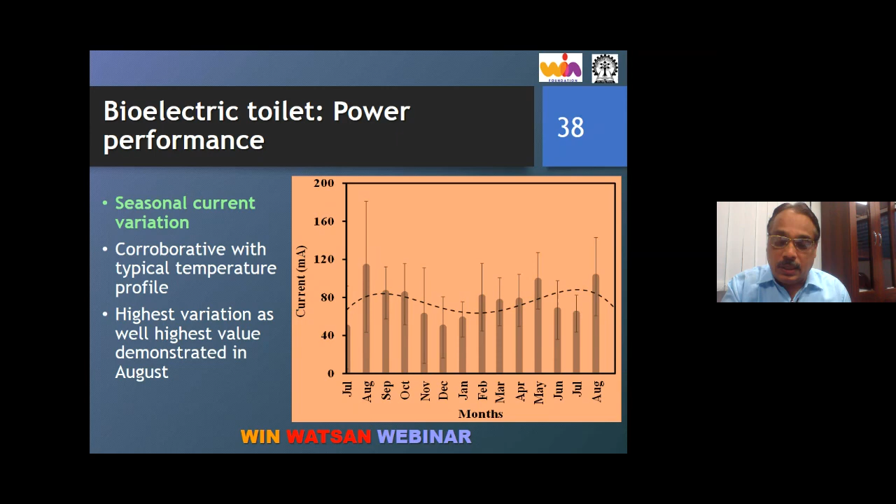There is no smell in the surrounding of the toilet, and this is the seasonal variation that I am demonstrating. This water is suitable to be reused back for flushing, so using a solar power pump, we are pumping this treated water back to the elevated service reservoir.

This way, it is making a water-free toilet. People only have to carry 1 or 2 liters of water for cleaning purposes, and the evaporation loss that the system faces varies with the season, from 8 to 15%.

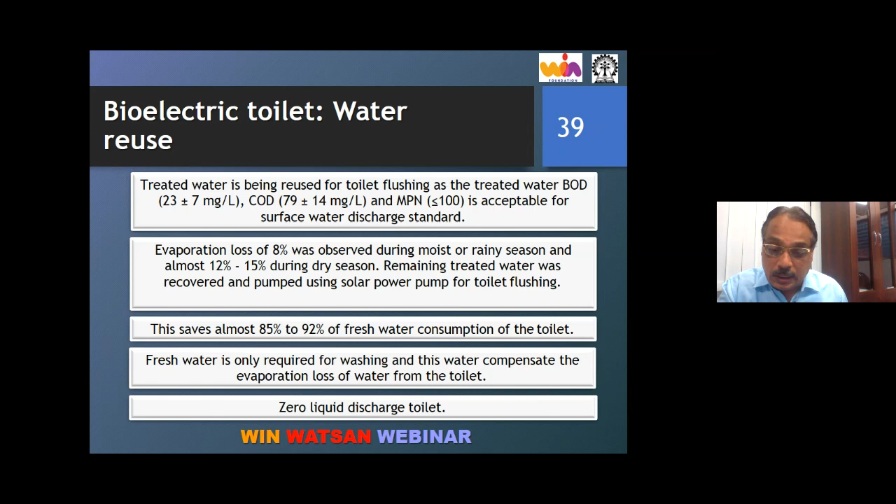This evaporation loss could be compensated by the water used for cleaning, making it a perpetual water-saving toilet which also generates electricity. This electricity can be used for illuminating the toilet at night. In India, where toilets are located away in rural areas, ladies are particularly reluctant to use the toilet at night due to fear of insect or animal attacks.

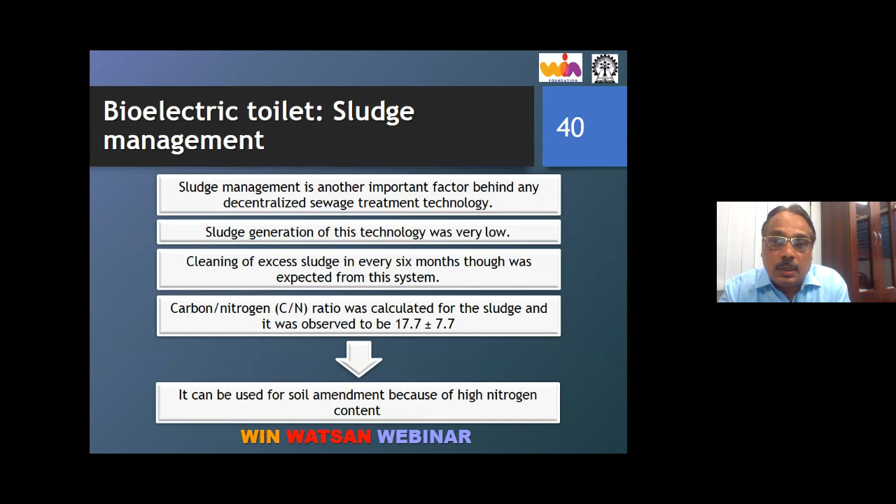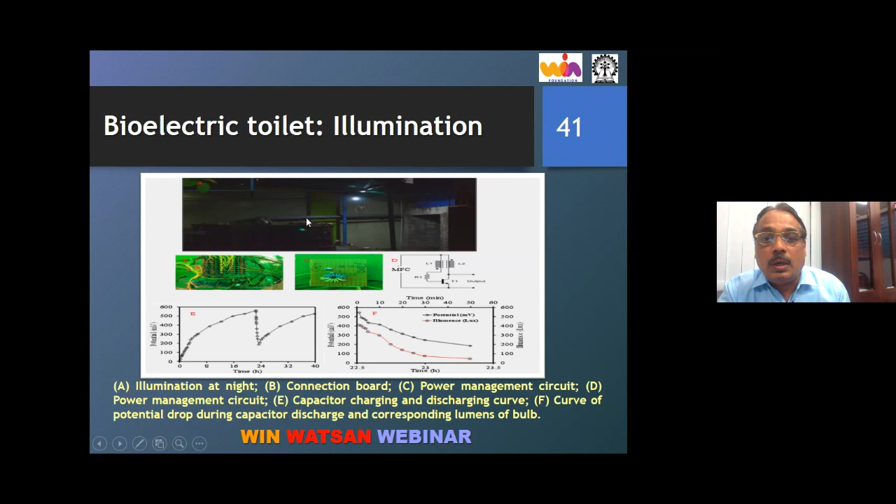So this model will encourage application of this kind of toilet, and you can see the toilet premises being illuminated by the electricity generated on site, while offering treatment to the sewage and producing reusable quality treated water that meets the requirements per the newer NGT guideline for horticulture or flushing the toilet. Another similar model was set up at NTPC NETRA in Noida, New Delhi, which gave similar results.

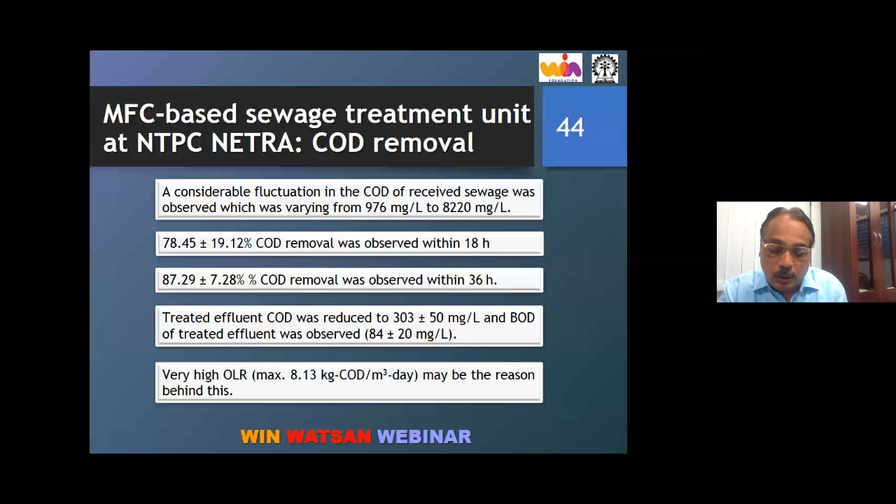Although the input COD characteristics was very high because it was directly receiving wastewater from the guest house generated. And the last to move, how could be the way forward?

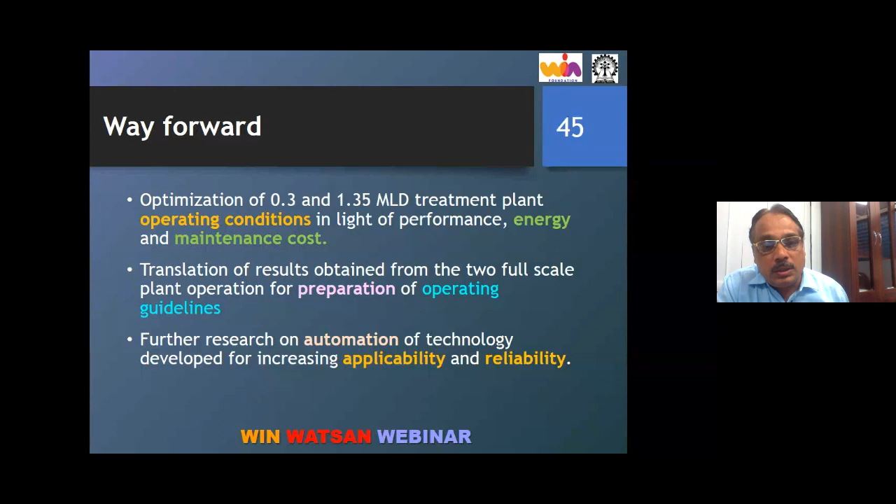We are looking at the optimization of 0.3 and 1.35 MLD treatment plant operating conditions so that we can enhance its performance. The energy requirement can be reduced further, the maintenance cost can be reduced further. Based on this experience, we will provide operating guidelines for replication of these plants at different places in India. Further research on automation of the technology developed for increasing its applicability and reliability is something we are looking into at IIT Kharagpur.

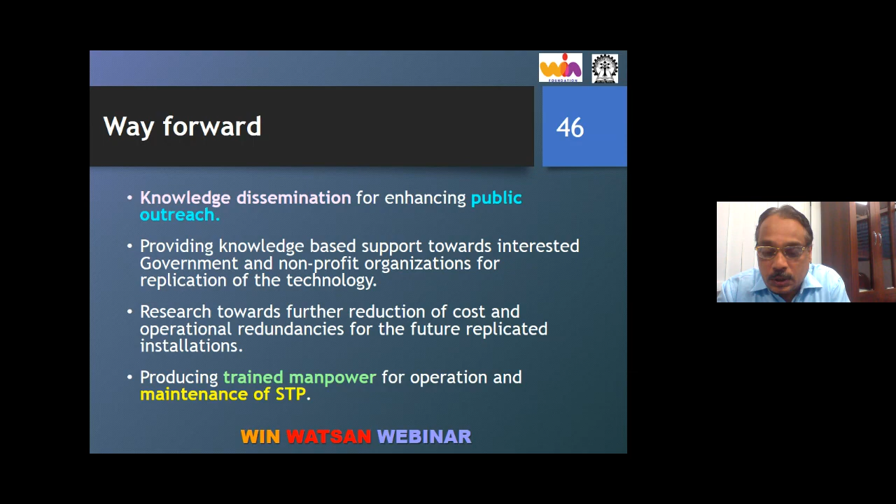The knowledge dissemination for enhancing the public outreach, providing knowledge-based support towards interested government and non-profit organizations for replication of this technology, the research towards further reduction of the cost and operational redundancies for future replication of the installations, and producing trained manpower. This is missing at present in India, so we are trying that in this process we should train manpower having expertise in operation of STPs.

They have donated 2 crores for undertaking this water related research. The name itself, Re-Water, means we are trying to reclaim the polluted water to make it potable quality, reusable quality treated water. And Department of Science and Technology for giving us funding.